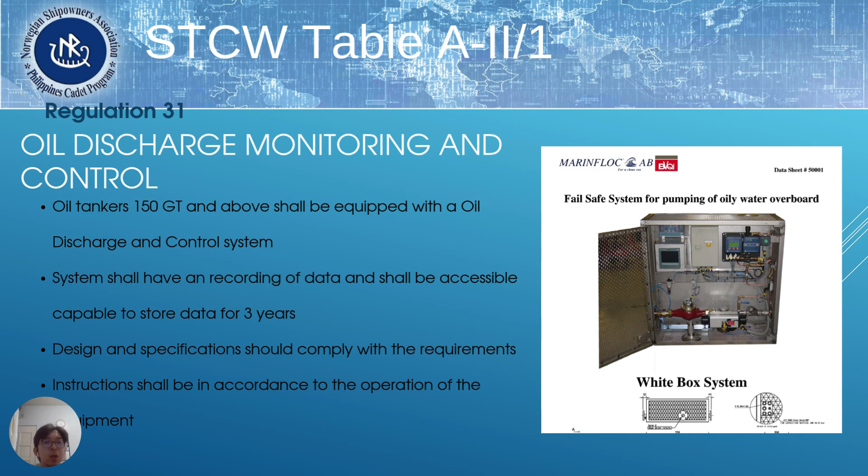Continuing our discussion, our next topic is crude oil washing, or COW. The COW is a machine used to clean the cargo hold. I'll show you a video of how it operates and how it works.

Let's first look at the different types of crude oil washing machine. There are two types: the single nozzle programmable and the non-programmable twin nozzle types.

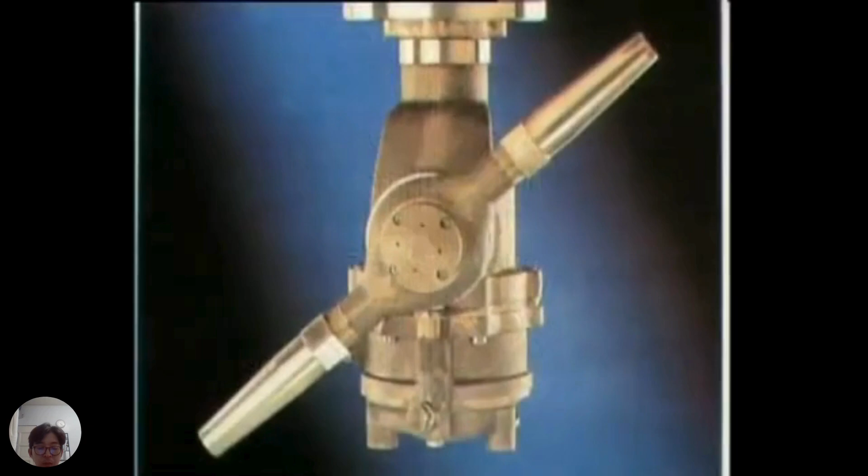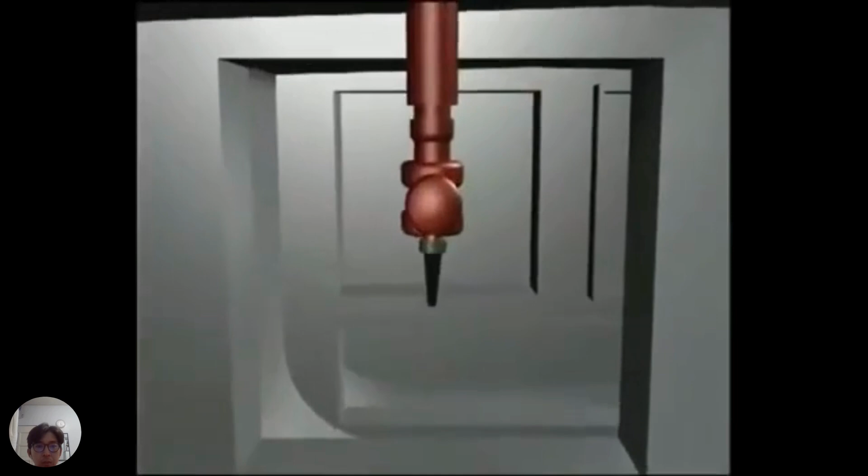Single nozzle programmable machines can be set to wash specific areas of the tank. To save time, the upper parts of the tank can be washed during the bulk discharge. A typical initial wash pattern might wash from 140 degrees to 30 degrees.

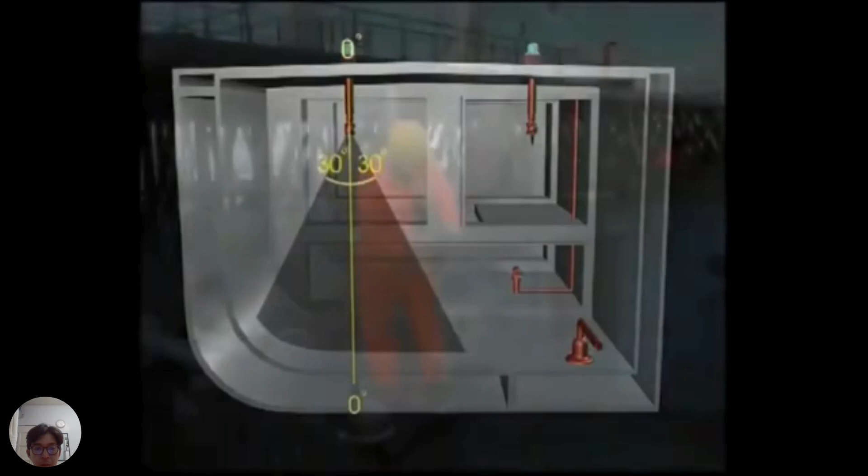As most residues are on the bottom, the wash might include two cycles: one washing from 60 degrees to 0, and one from 30 degrees to 0. After the first cycle, soundings should be made to determine the effectiveness of the COW, the residue present, and whether a second bottom wash is needed.

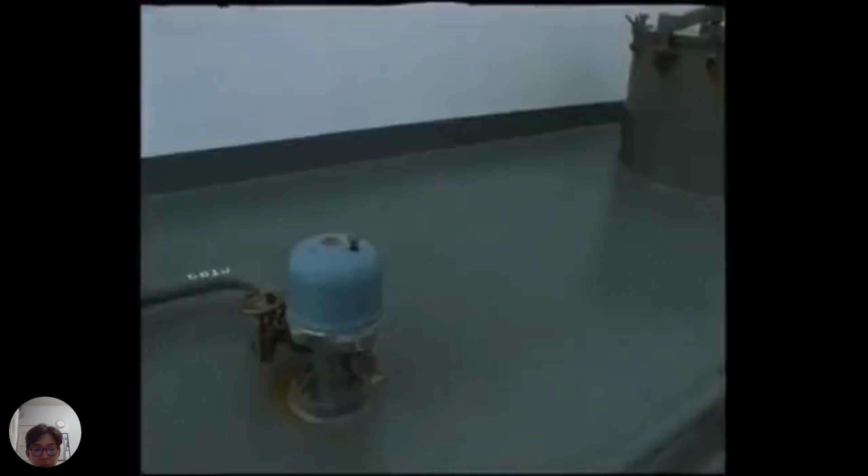With double-hulled ships, top washes may not be needed on every discharge. These programmable machines need to be programmed for every wash. Typically, they have a throughput of between 110 and 170 tons per hour.

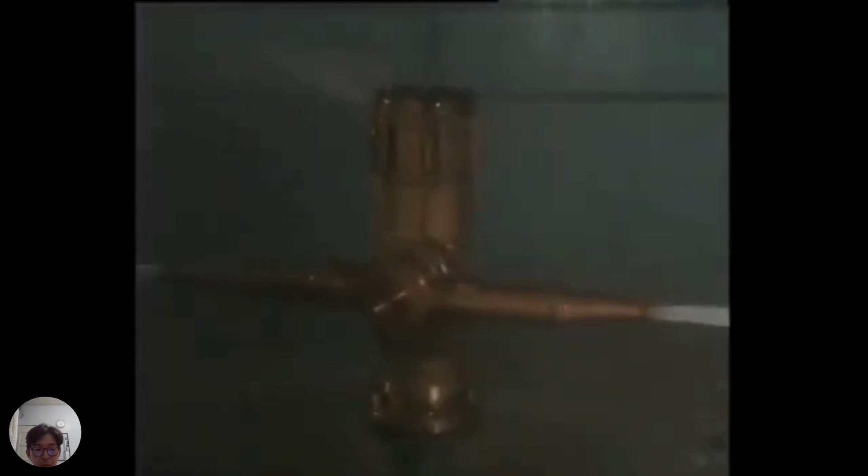The twin nozzle machines are not programmable. They always carry out a complete cycle in a specific time. The cycle time will depend on the correct line pressure.

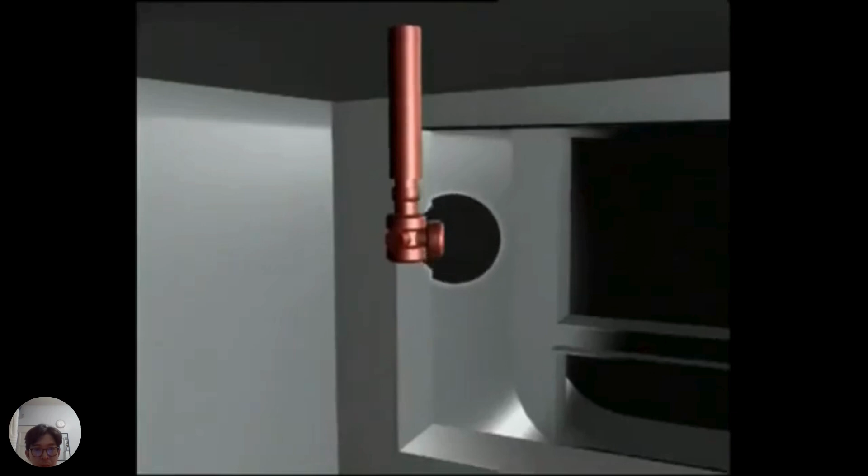During bottom washing, it is essential that there is no liquid buildup, as even 20 centimeters of oil will protect the residue from the jet action of the COW machines.

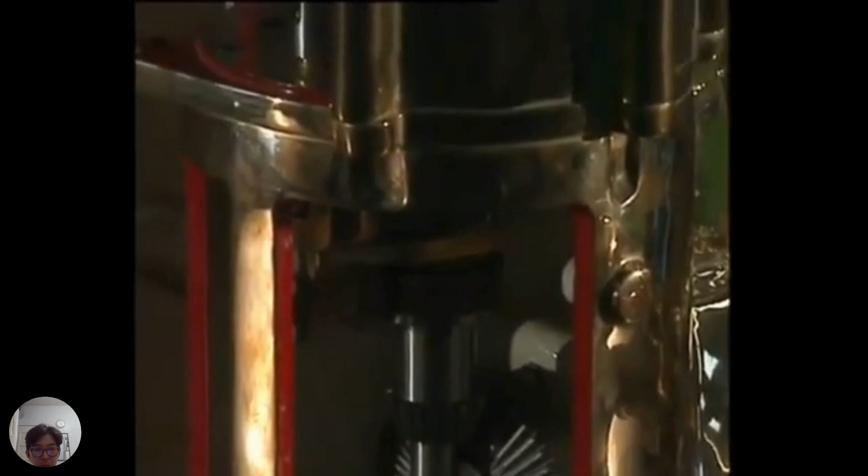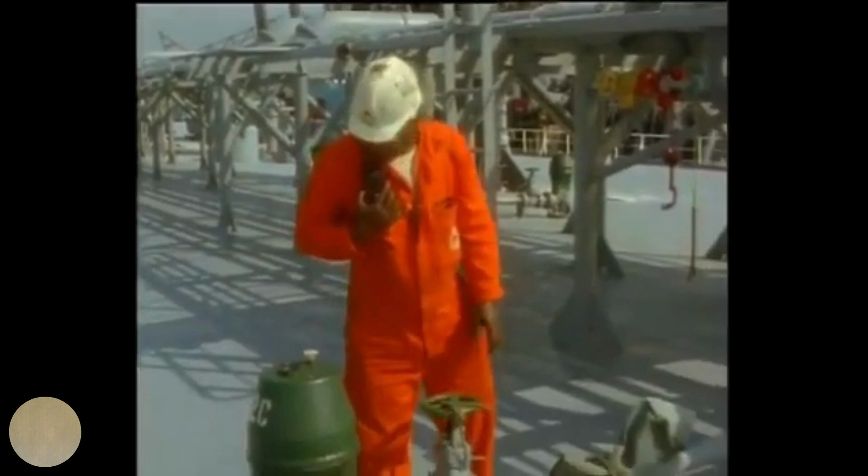Crude oil washing machines are driven by oil from the cargo pumps acting on an impeller. For the washing to be effective, the oil pressure must be correct. If it's not correct, the oil will not hit the sludge with the right amount of energy, and neither the jet length nor the cycle time will be up to specification. The result will be ineffective and prolonged washing. The penalties include increased discharge time and increased oil remaining on board.

The washing machines are fitted according to the individual tank's shadow diagram and the MARPOL requirements. The equipment is always tested before certification.

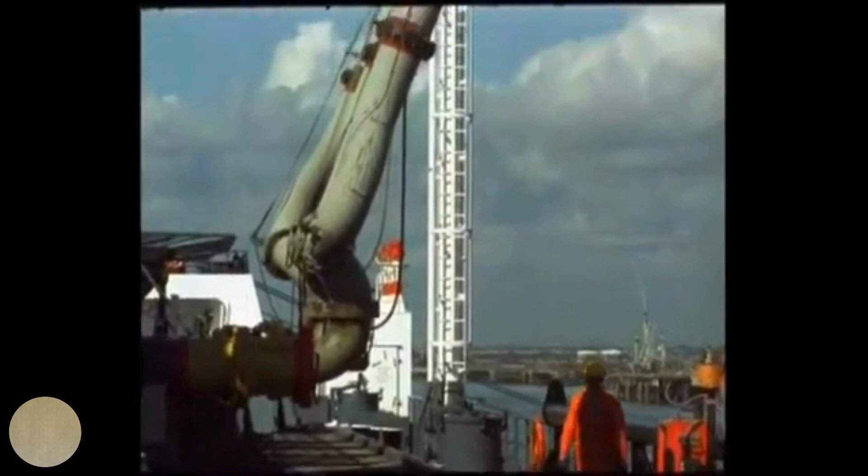Crude oil washing is all about getting as much oil ashore as possible. So about half the discharge time is spent bulk discharging the cargo, and about half crude oil washing and stripping.

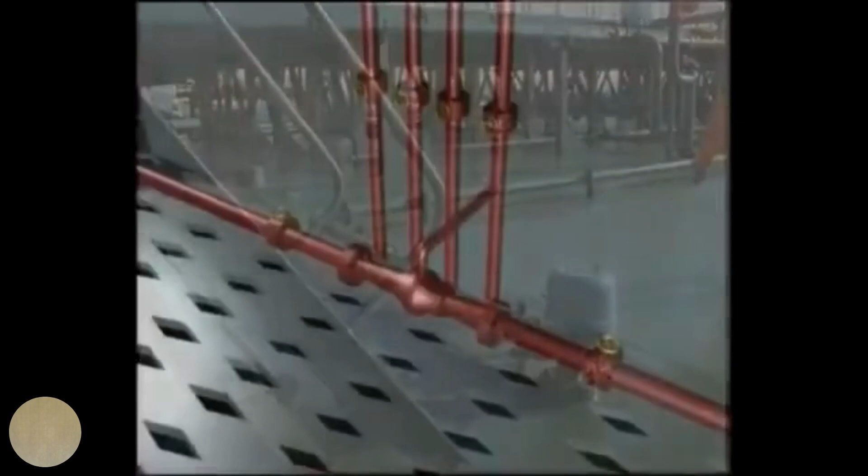Eductors are the preferred way of stripping. They have no moving parts but require a good supply of cargo at the correct pressure. Stripping pumps and vac strip systems are also commonly used. Check your manuals to see the equipment fitted to your ship.

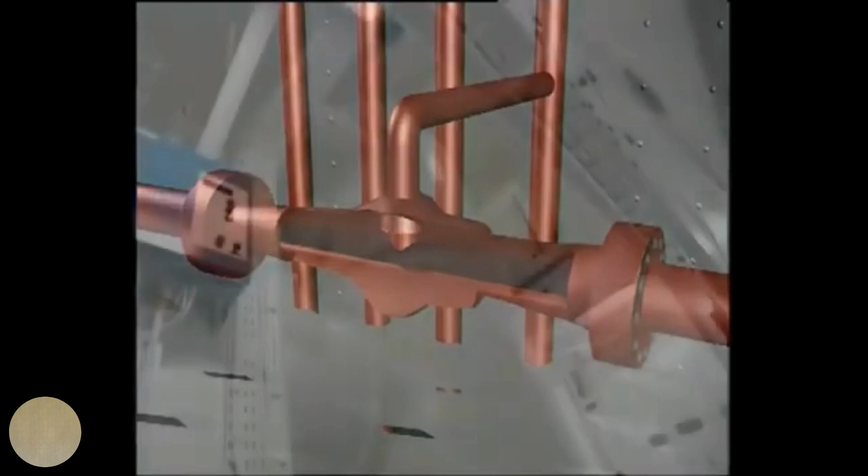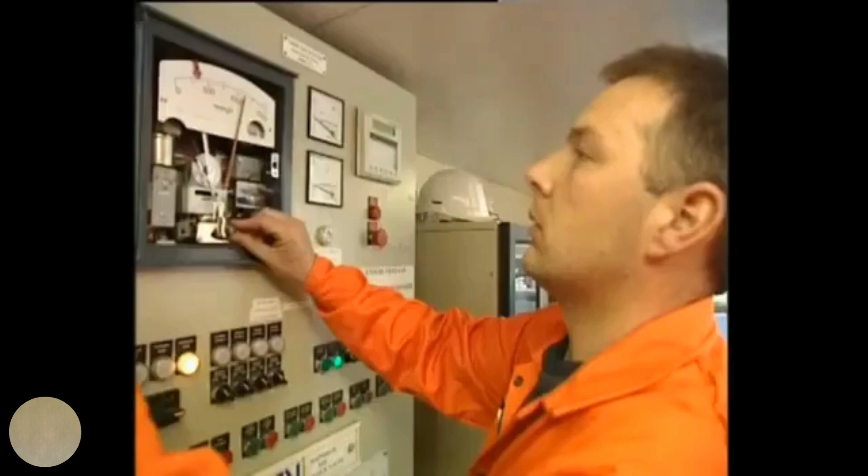Crude oil washing is only possible with inert tank atmospheres, so this makes the inert gas system another component of the COW system. The inert gas system is dealt with in a companion training package.

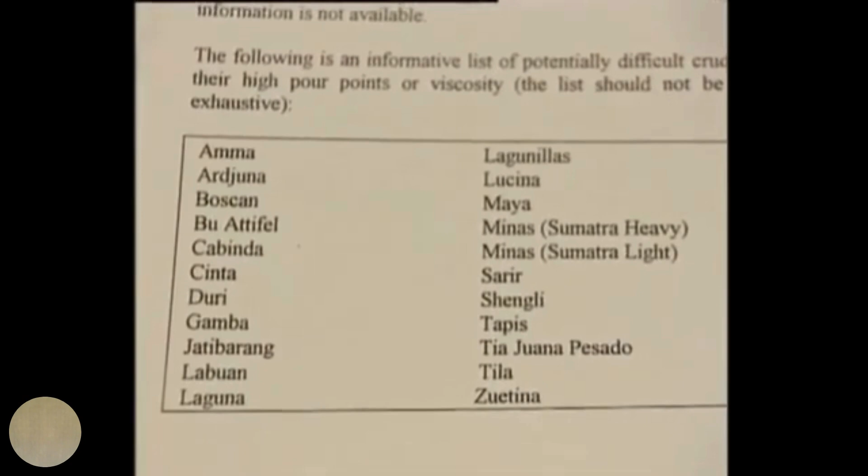The final component is the right crude oil. Some heavy crudes are designated unsuitable for COW by the IMO because they are very viscous. Check your ship's COW operations manual for details.

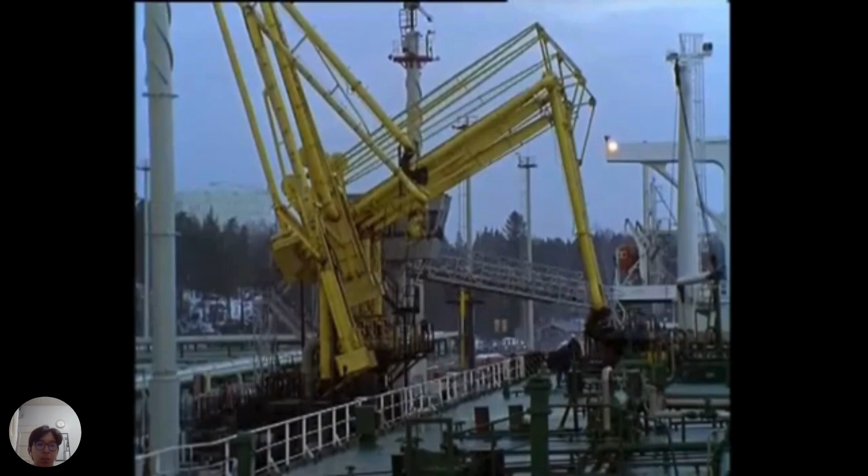Low temperatures can pose the risk of crude oil solidifying in the supply lines. It may need to be heated. The temperature of oil used for COW must be at least 10 degrees Celsius above its cloud point. Again, check your COW operations manual for more information.

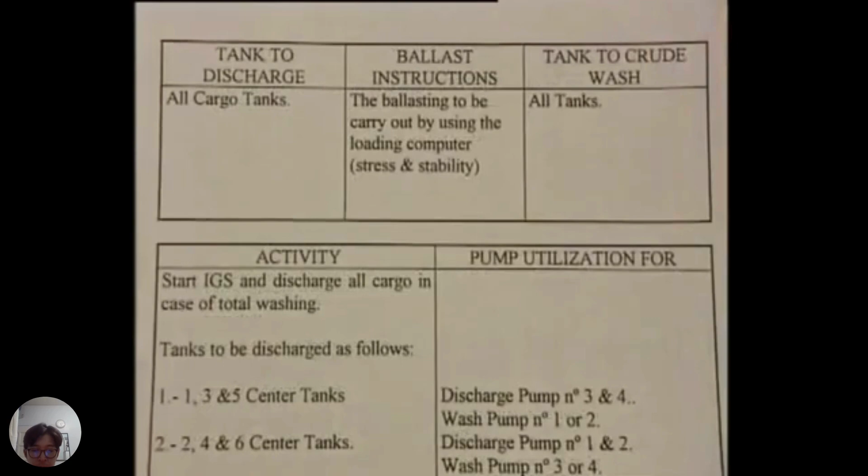This manual is a mandatory requirement for every tanker. It will contain the basis for the COW plan, itself the basis for the COW operation. The vessel requirements and charterer's instructions are also essential in planning crude oil washing.

I just received the voyage instructions here. You must always be certain that your COW plan meets your charter party obligations. Any doubts should be clarified between the master and the charterer before the planning of the discharge and crude oil washing. What I propose then is we do crude oil washing for MARPOL requirements, and additionally I would suggest we carry out a bottom wash for this grade to maximise outturn. I can't see there being any problems with that. I'll investigate with the agent just in case. Okay, then, I'll plan accordingly.

The washing plan is an integral part of the discharge plan. Calculation of stress, trim and draft is essential for every hour of the discharge. Careful thought is required, particularly if there is more than one crude on board or more than one discharge port. You must not just reuse old plans unless the discharging circumstances are identical.

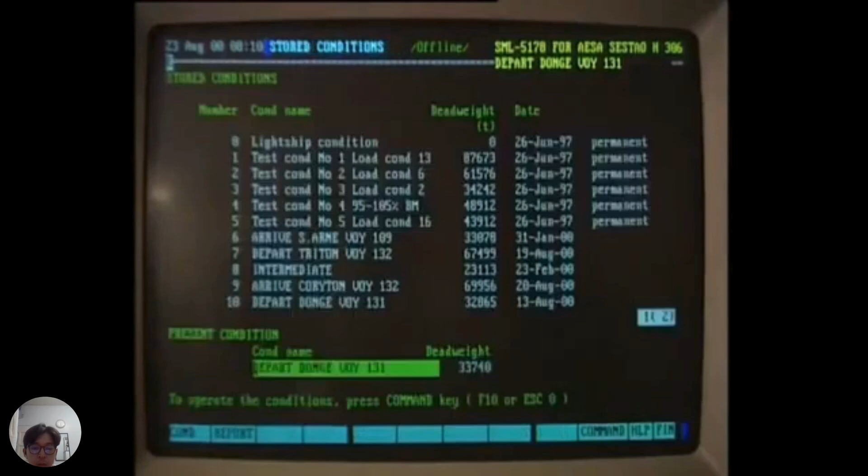Different crudes will contain different amounts of wax and sediment. The more wax, the more washing they will require. If a slop tank is being used as a reservoir for COW, it must be recharged from time to time to keep the crude oil fresh and not saturated with wax.

Overwashing using light crudes should be avoided, as it means loss of some of the higher fractions. Time will be a crucial factor. That's why it's essential to know the cycle times of the washing machines to allow sufficient time.

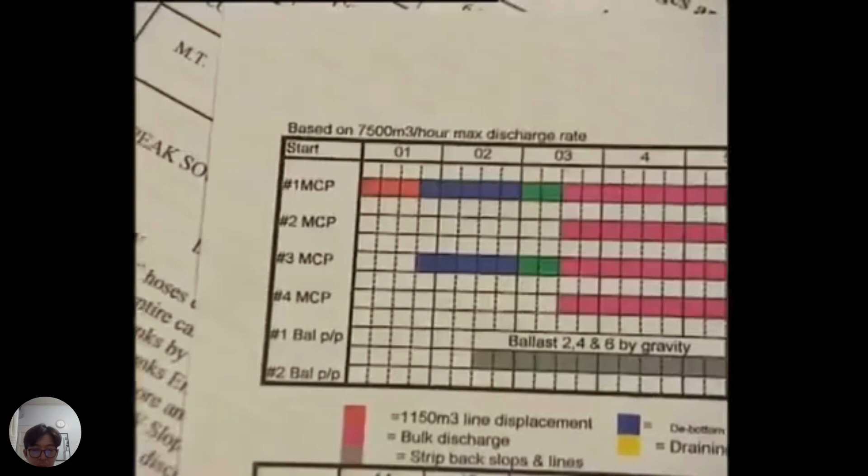Allowance must be made for cargo pump capacity for washing and final stripping. The trim will affect the crude oil washing. The International Safety Guide for Oil Tankers and Terminals recommends the use of a bar chart showing pump and cargo lines being used, including COW requirements. This will help ensure that the right equipment and cargo is available for washing.

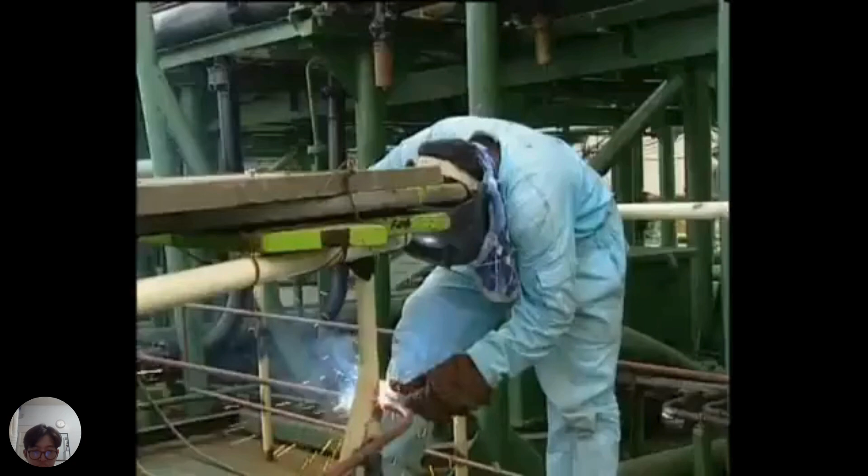The plan must always take into account that the ship will need to dry dock. Additional washing during the last few discharges before dry dock will reduce the residues down to the minimum and avoid delays and the high costs of manual desludging.

Once the master has approved the plan, the watch-keeping officers need to sign it. All officers involved in the discharge must have access to the plan. They should be encouraged to ask questions to ensure that they understand what needs to be done and when.

And it's a full bottom wash on all tanks. We're doing that to maximise the outturn with this particular grade as it's slightly heavier than usual. Any other questions at all? No, that's it, that's fine.

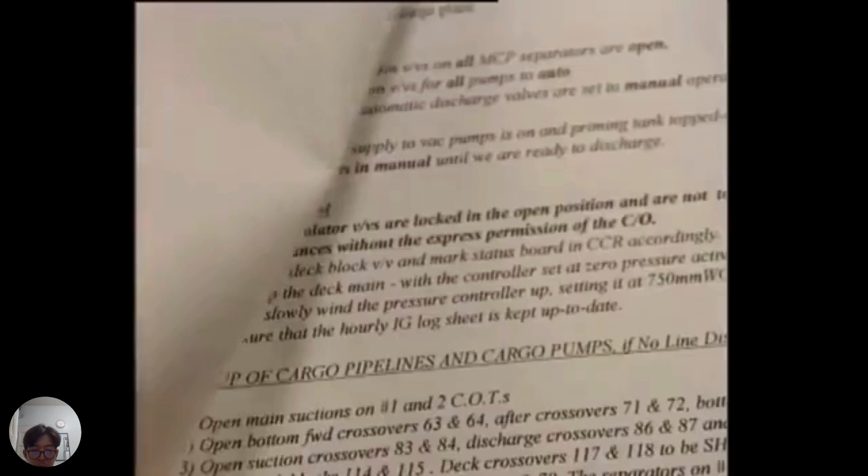The plan is the basis for the COW operation. The terminal staff will need to approve it. Surveyors and inspectors may need to examine it.

The COW operation begins on the day before berthing. Your manuals will have a full COW checklist that you must keep to.

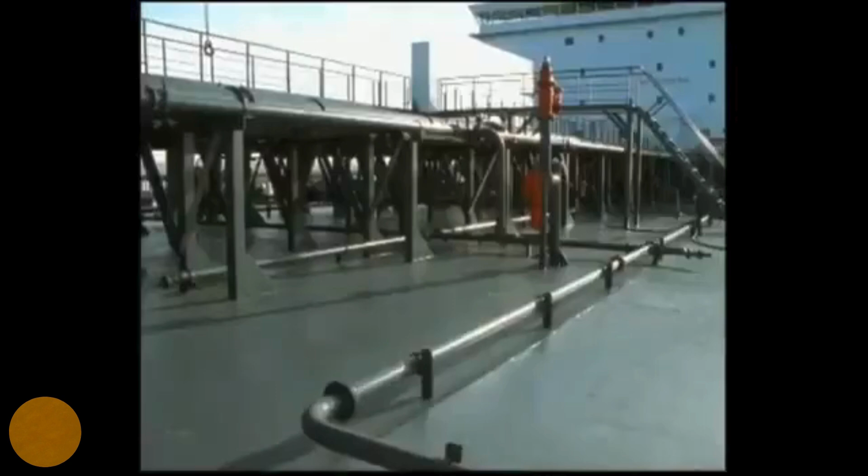Hello Jack, that's us just about to start the cargo pump to test the COW line. The COW lines must be pressure tested to normal working pressure. This can be done by recirculating cargo, but the pressure needs to be increased slowly to reduce the risk of hydraulic shock at the end of the lines.

Hello Jack, pump's running, just going to start increasing. We've got about 4 bar on the COW line now. Okay, there's no signs of any leak so far. Okay, just gradually bring the pump up now.

There must be a thorough inspection for leakage, and any leaks must be repaired. A record must be kept of the tests.

Okay Jack, that's us up to the 10 bar now. Can you just have a good look round please? Yeah, there doesn't seem to be any signs of any leaks out on deck. Okay, copy that. All pressure gauges must be checked.

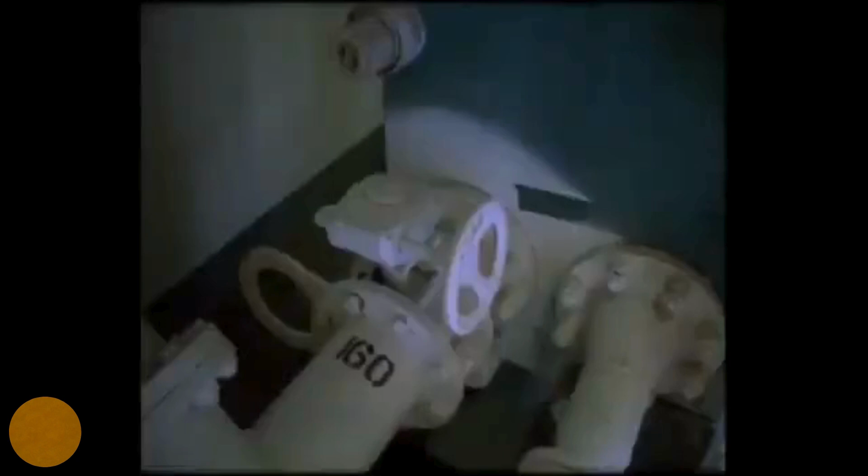This will include the gauges on the top discharge line, the manifold, and the main tank washing line. The washing lines must be isolated from the heating arrangements, and any hydrant valves on the washing line must be blanked. The stripping arrangements need to be checked.

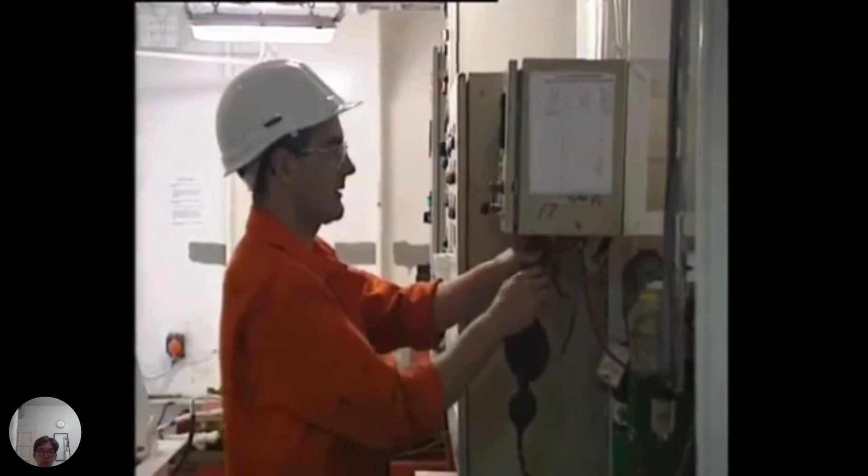Last but not least, the inert gas system should be checked and prepared as specified in the ship's IG manuals. Okay Jack, thanks very much. All these tests and checks need to be recorded in the log for presentation to the terminal staff.

Once alongside, the COW plan and the discharge plan must be scrutinized and approved by the terminal staff. The time must be taken by both sides to ensure that everyone is certain that everything is in order.

In addition to these plans, there are many issues that need to be agreed with shore staff. These will include details of terminal regulation, details of communication between the ship and the terminal, and emergency shutdown procedures.

The pump's now settled at 1200 revs there, Gary. If you want to come up while we do the line displacement. Once discharge begins, the COW plan becomes active.

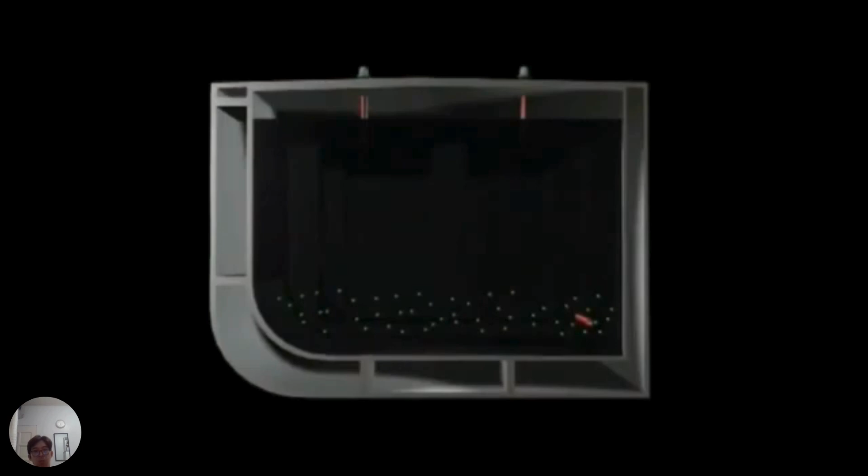To reduce the risk of electrostatic discharge inside the tanks during COW, any tank that is being used as a source for washing oil must be partially discharged by at least 1 metre. This ensures that any water that has settled out will not be used for COW.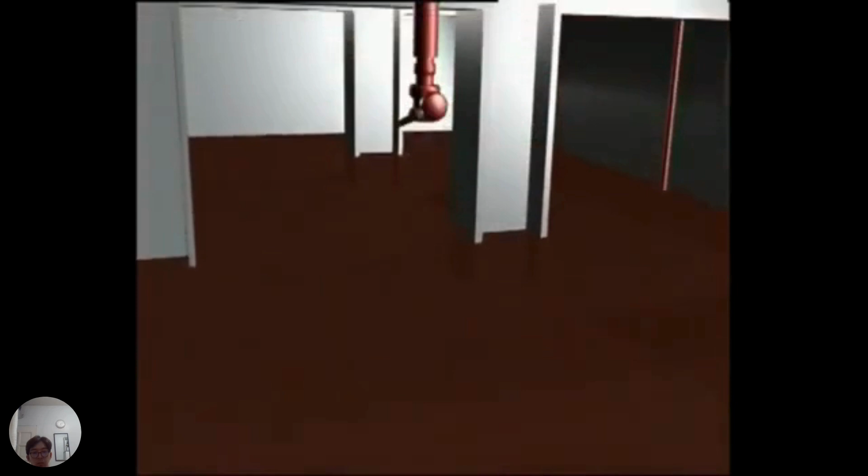If the slop tank is being used as a reservoir, it must be completely emptied and refilled. Care must be taken not to overpressurize or overfill the slop tank during backfilling.

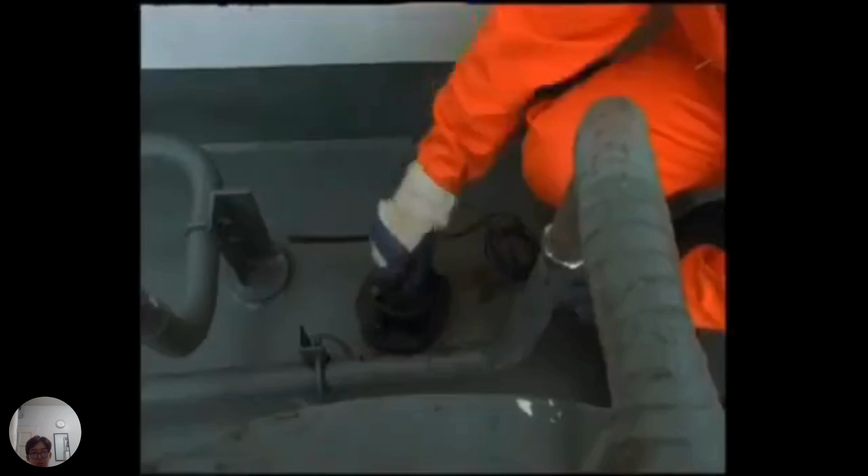Before washing starts in any tank, the oxygen content of the tank atmosphere must be checked to be certain that it's below the specified maximum. This means checking at several levels in the tank.

Hello Phil, can you stand by on the COW machines and the slop tank please? We're going to start cowing in a moment.

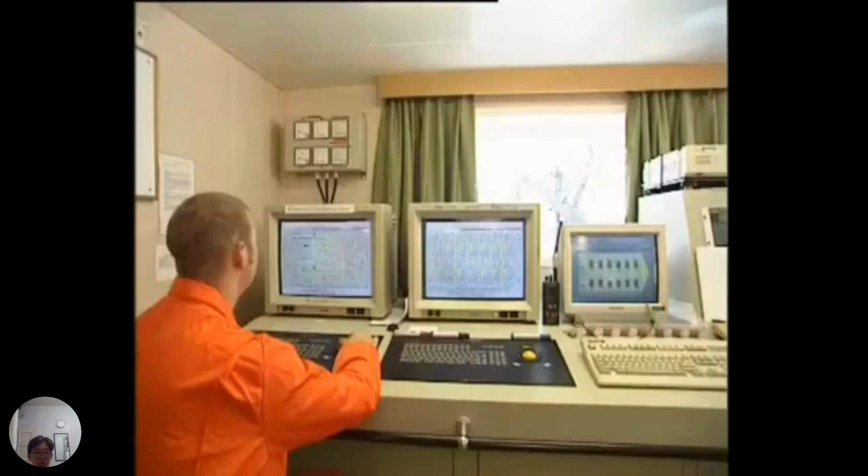Once discharge is underway, and once the tank to be used as a reservoir for the COW has been filled with dry oil, then at the appropriate time set out in the plan, the washing operation is started.

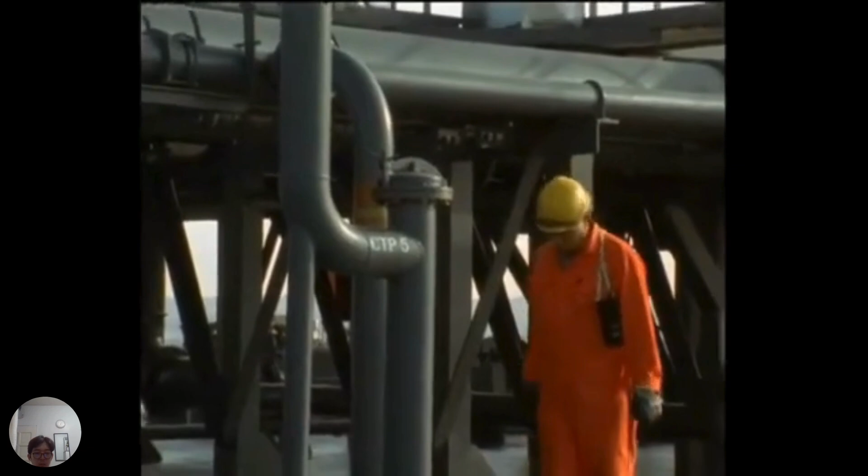Immediately, all the lines must be checked again for leaks by a crew member. While crude oil washing is underway, there should be at least one responsible person on the deck at all times, supervising and monitoring the procedure.

Regular inspections must be made, including checking that machines are fully operational and that the cycle times are correct. Check that the machines are washing in the right tanks.

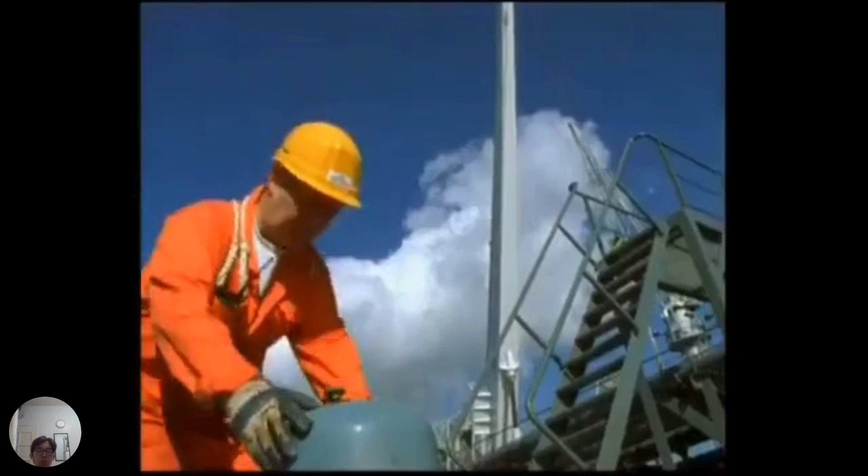Always take the time to check on each machine. You can tell a lot by listening to them. You should be able to hear the jet moving across the tank bulkhead.

Always keep an eye on the COW line pressure. Correct pressure is the key to effective washing.

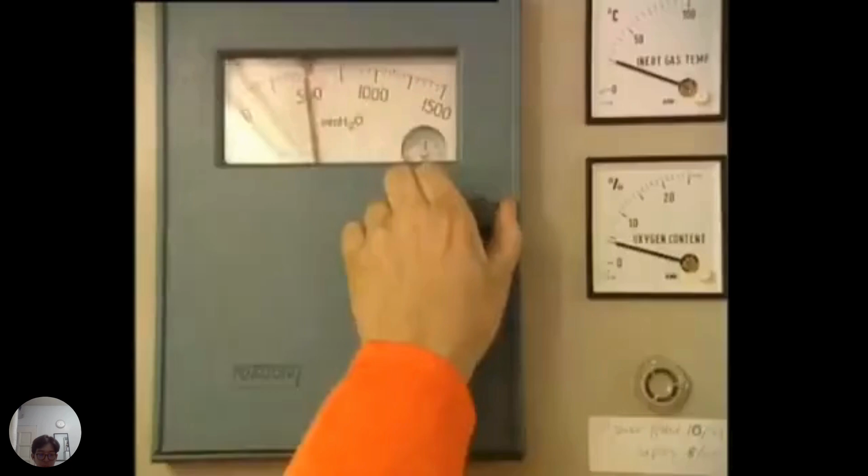Pressure in the tanks is important too. Make sure that vapor pressure does not build up during washing. This can lead to unplanned venting to atmosphere, which may be illegal in the terminal. Hot sunny days can have the same effect.

The plan must be kept to at all times. If things start to go wrong, the chief officer must be notified immediately. Better to call him sooner rather than later if you are in any doubt.

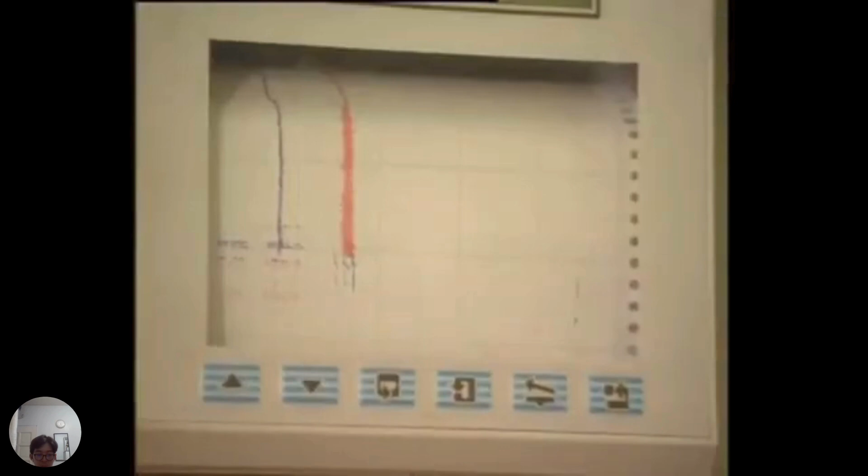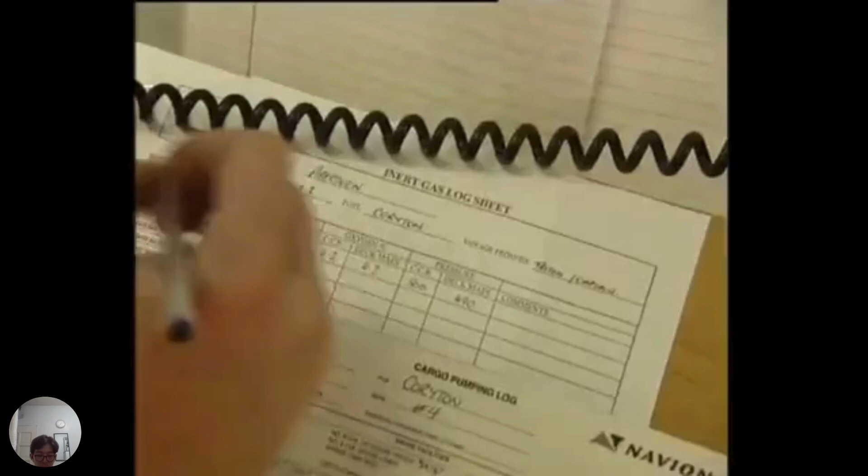Always check that the inert gas system is operating correctly, with an oxygen content below 5% or below 8% for older ships, and enough pressure to maintain an excess pressure of 100 millimeters water gauge in the tanks. If the oxygen level increases, the discharge may have to be stopped, and with that, the COW.

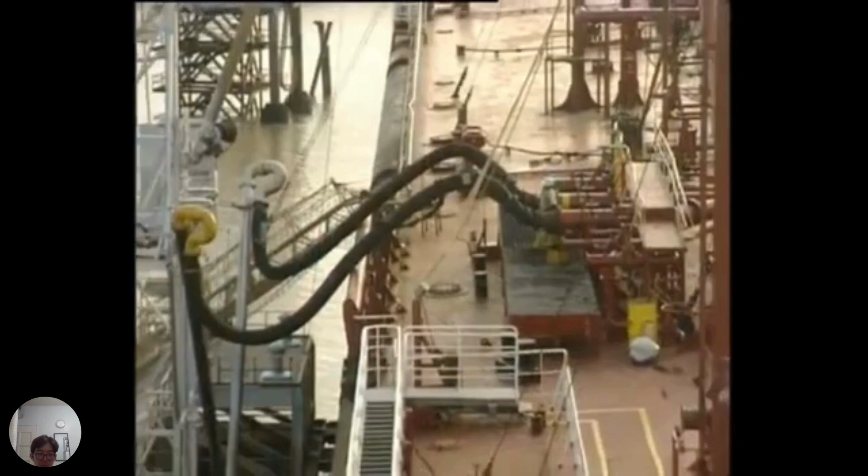If ballasting is being carried out in a non-segregated ballast tank ship at the same time as cargo discharge and cow, then there must be strict supervision. This is because of the increased risk of over or under pressurization and the risk of cross-contamination between cargo and ballast lines.

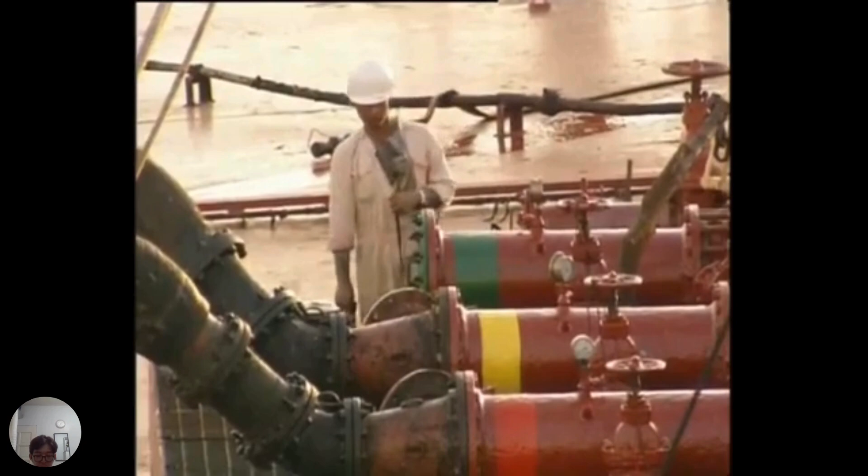The most important part of the crude oil washing program is the bottom washing. The trim becomes of vital importance for the final stages of bottom washing.

Hello Dave, that's the branch on 5 shut. The machine should be stopped now. You can dip the tank please.

The bottom wash is monitored using a dipping rod or by remote gauging. The dipping rod must be used at the aft end of the tank. It's important to avoid excessive build-up on the bottom, as this will reduce the efficiency of the washing process.

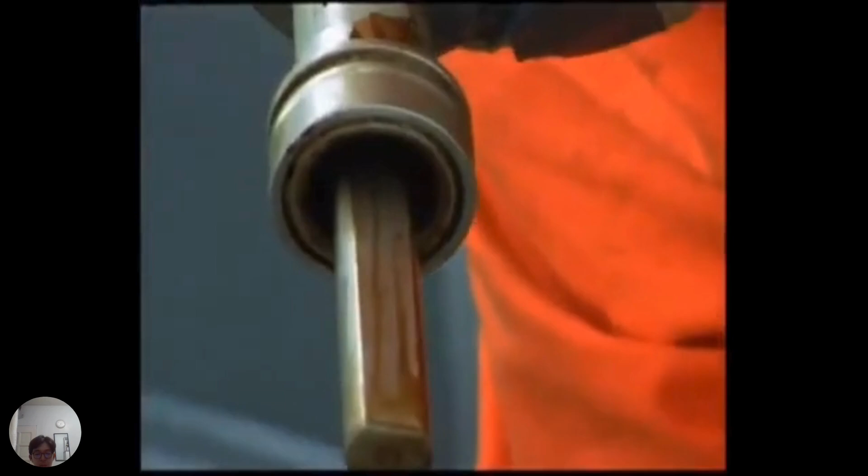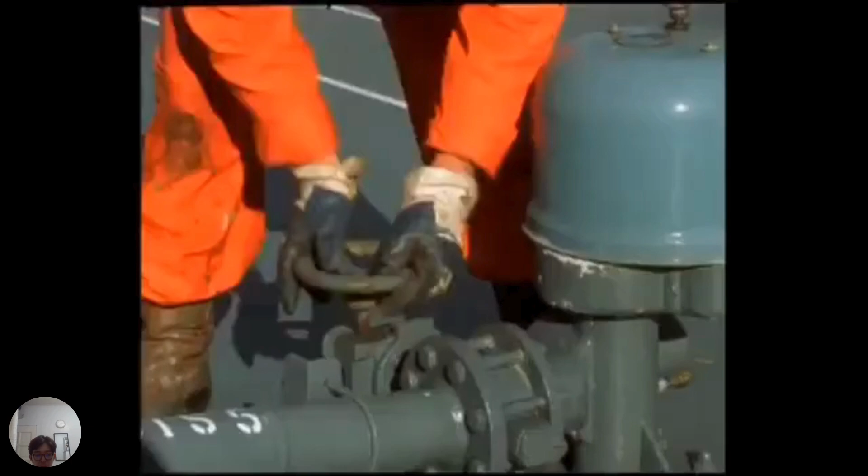When washing has stopped, the valve to each washing machine must be closed. That's the crude oil washing complete. If you can slow the pump down to 12.

Once the cargo operation is complete, all main lines and stripping lines, pumps and cow lines must be drained as quickly as possible. This is very important if the crude oil has been heated.

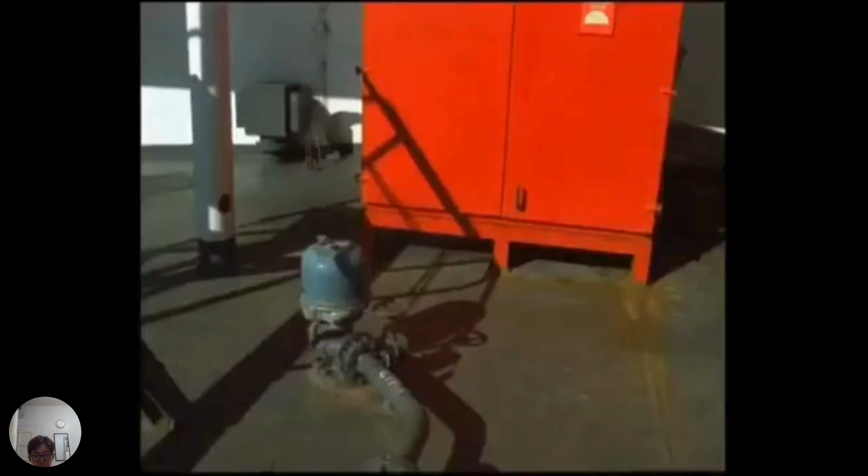Hello Deck, that's the crude oil washing complete. We've shut the branch into the cow system. If you can go and open the machine forward in one port and aft in the slop tanks please to drain the system down. To speed this up, open one forward washing machine and one machine in the slop tank,

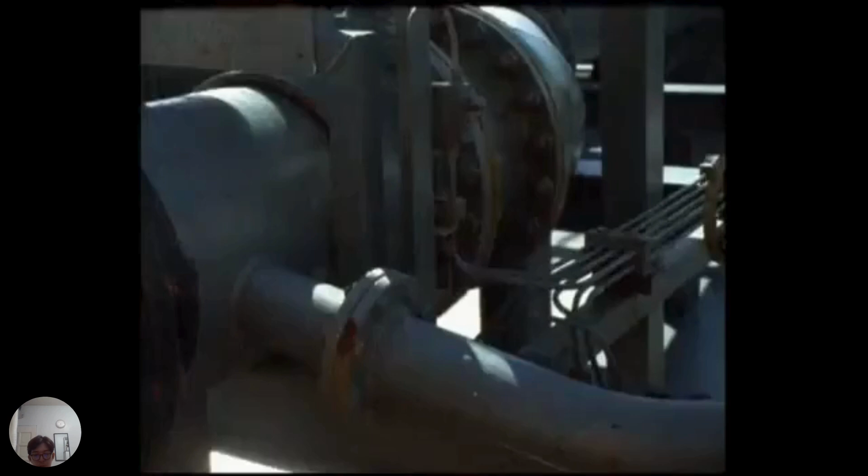so that all the cargo in the cow line drains into the slop tank. Final tank and line draining is done with a stripping pump connected to the shore, using a small line called the MARPOL line.

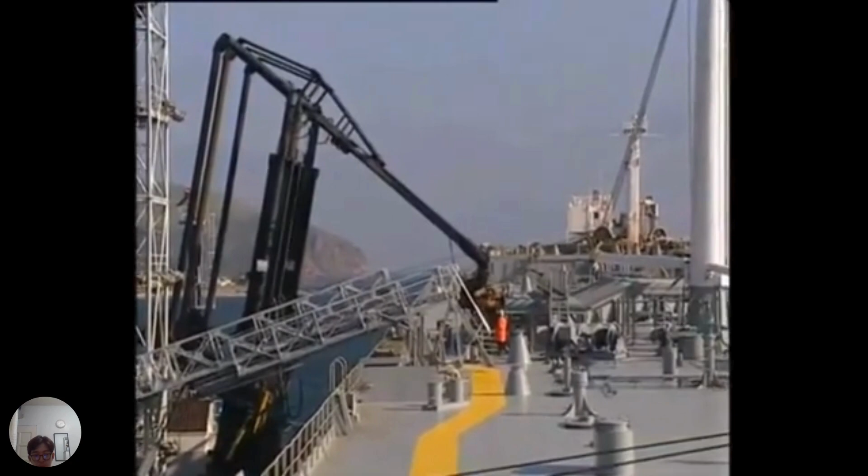Crude oil washing is an important part of crude oil discharge. Effective crude oil washing increases cargo outturns, reduces the amount of sludge buildup, and reduces the risk of pollution.

Effective maintenance of the washing machines is important. COW machines are not fit and forget. Make sure you maintain them according to the manufacturer's standards.

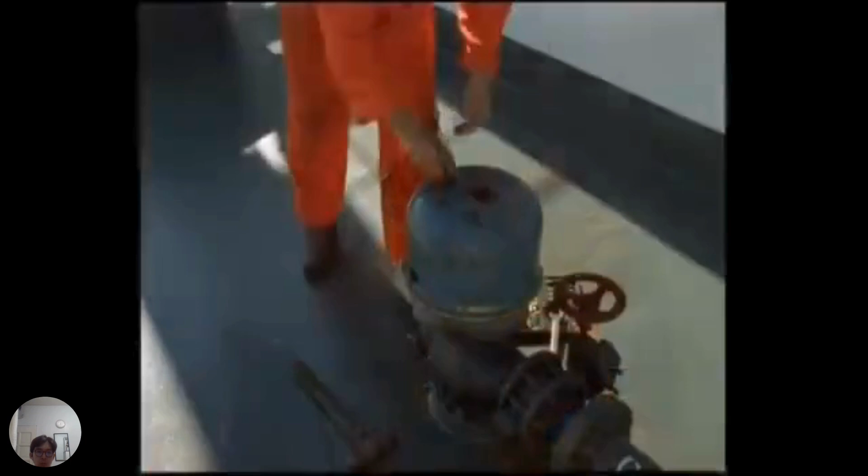Eductors need attention too. Check the time taken to strip a set quantity of liquid from a cargo tank. Loss in performance usually means that the eductor nozzle is worn and must be replaced.

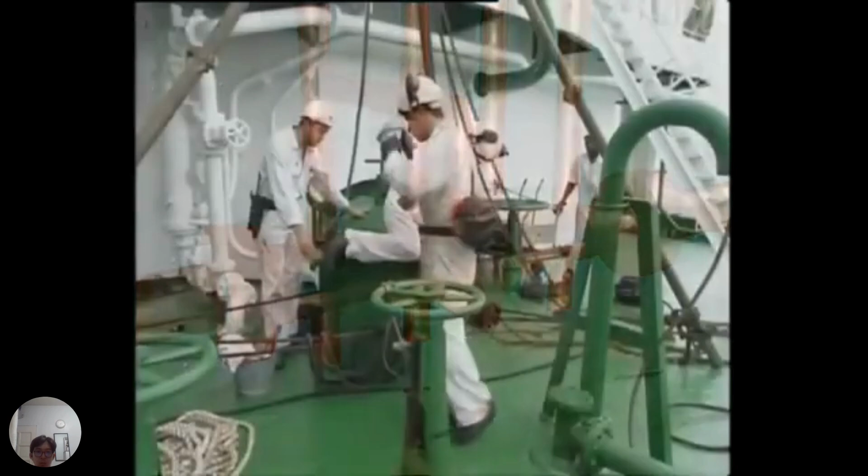Most of all, regular inspection of the tanks will tell you how well the COW machines are operating. Any build-up of residue should be noted and investigated.

Keep to the procedures described in your ship's manual. Always make sure that the plan fulfills charter party requirements and that this is recorded in the log.

For further information, refer to the crude oil washing requirements in order to ensure that the COW is effectively protecting the marine environment against pollution. The design, operation, and control of COW systems are required to the IMO specification.

IMO stands for International Maritime Organization, and only crude oil tankers in which the COW system and operation are surveyed and found to be in accordance with the specification will be issued the IOPP certificate, which stands for International Oil Pollution Prevention.

So again, the COW system is only available for tanker vessels which are crude oil tankers.

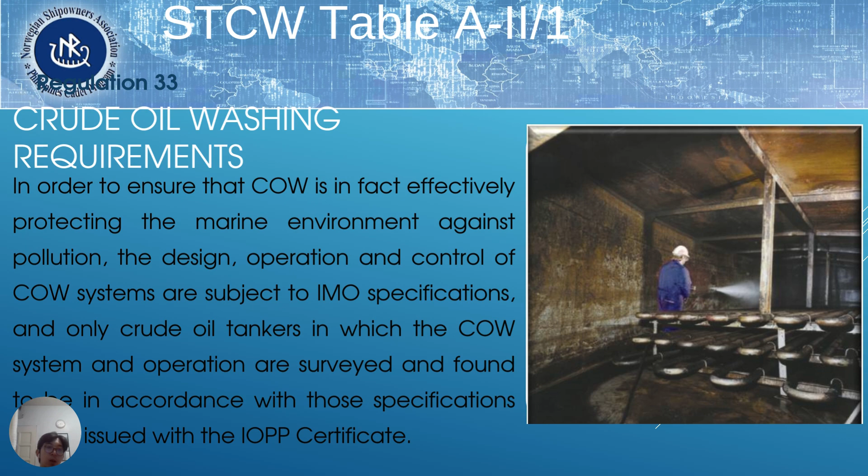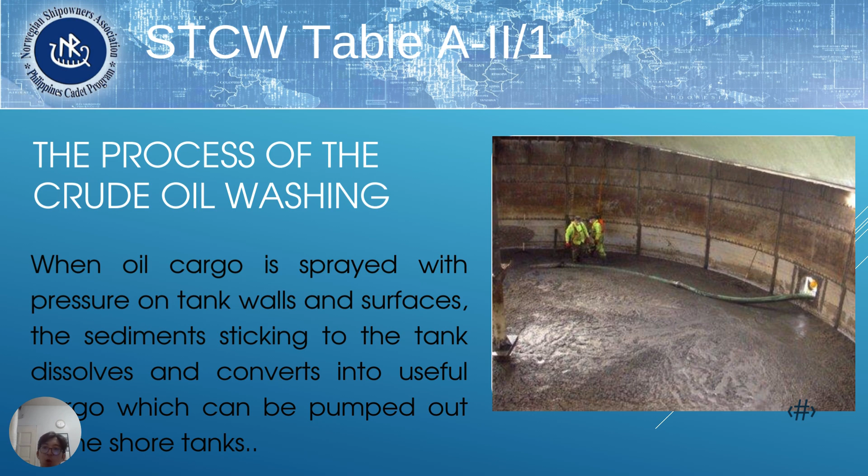The process of crude oil washing virtually eliminates the requirement of slop tanks on ships, and almost all cargo can be transferred to shore.

So what is the advantage of COW? First, reduction of pollution, potential increase in cargo outturn, less dead freight, reducing the residue left behind.

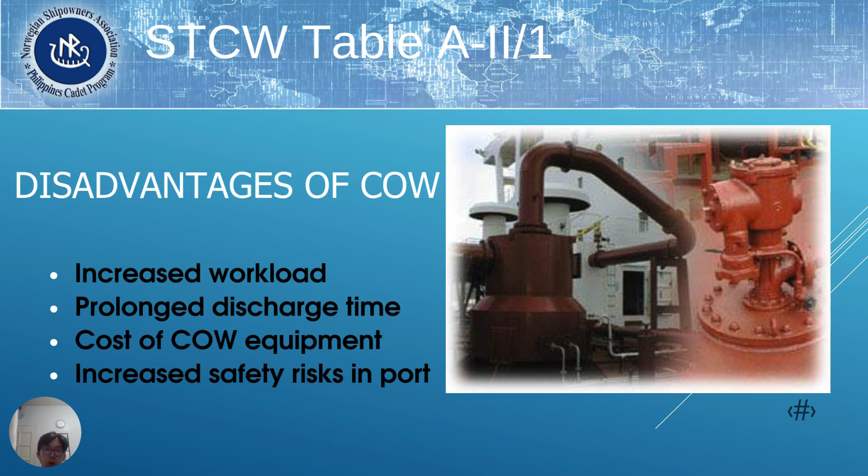What is the criteria for discharging? Before any pre-wash or discharge procedure is carried out in accordance with the regulation, the relevant tank should be emptied to the maximum extent in accordance with the procedure.

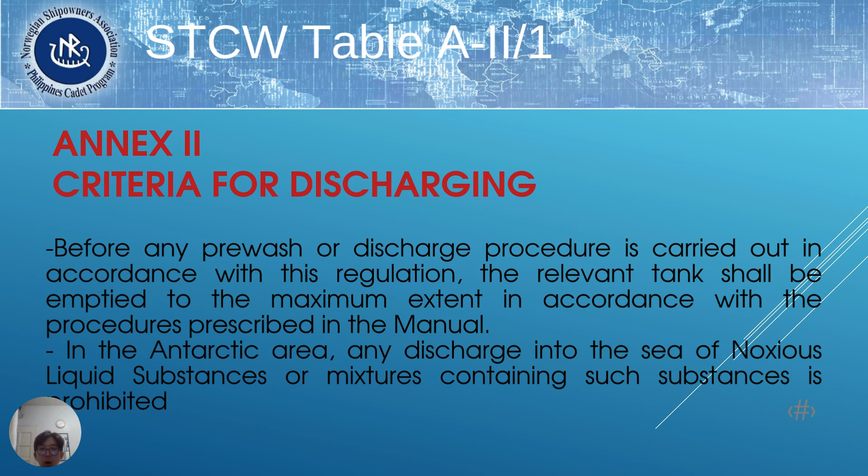When discharging, we also have the documentation. For documents relating to the carriage of harmful substances by sea, the correct technical name of each such substance shall be used, and the substance further identified by the addition of the words marine pollutant.

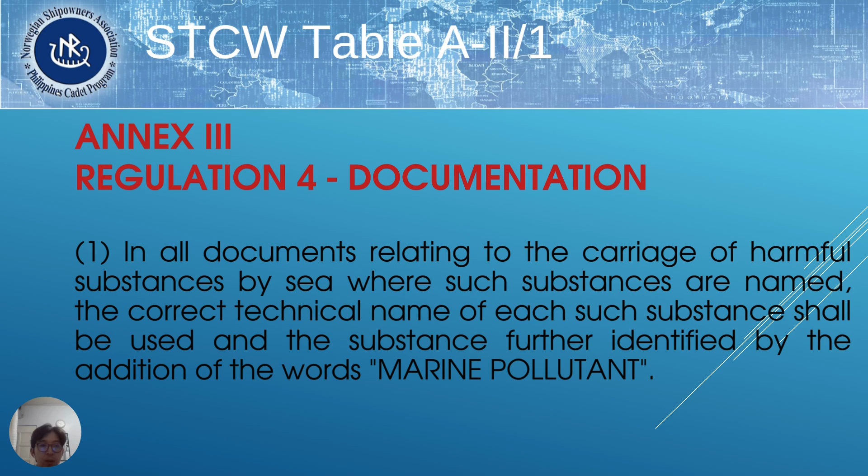Also under the regulation for documentation, it must be packaged, marked, labeled, and placarded as appropriate, and in proper condition for carriage to minimize the hazard to the marine environment.

As we have discussed last week about the classes of the IMDG code.

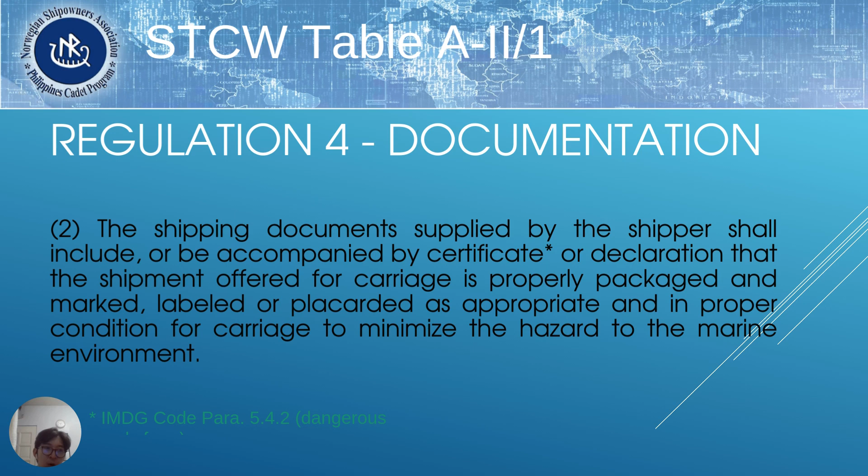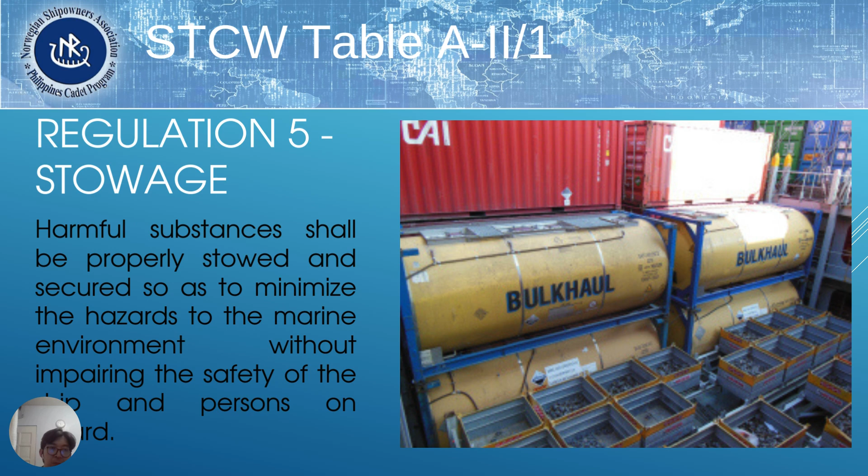For stowage, harmful substances shall be properly stowed, secured, and arranged to minimize the hazard for the marine environment without impairing the safety of the ship and the persons on board, which is the crew.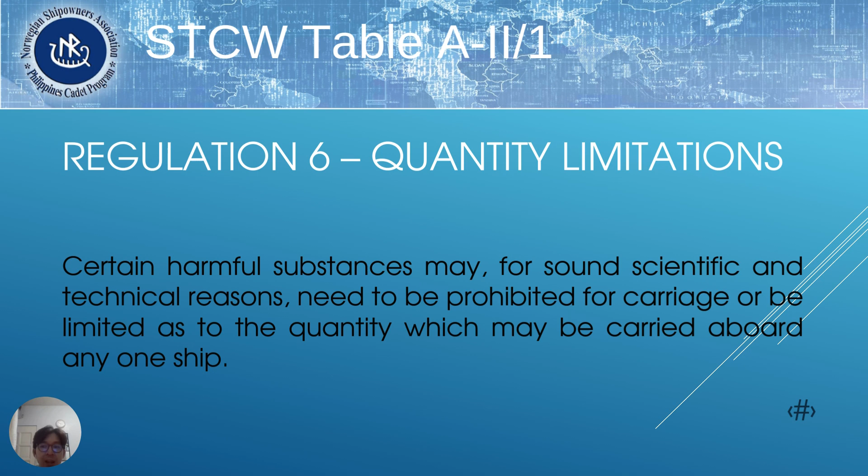Where there are clear grounds for believing that the master or the crew are not familiar with the essential shipboard procedures relating to the prevention of pollution by harmful substances, the party shall take steps to ensure that the ship shall not sail until the situation has been brought into order.

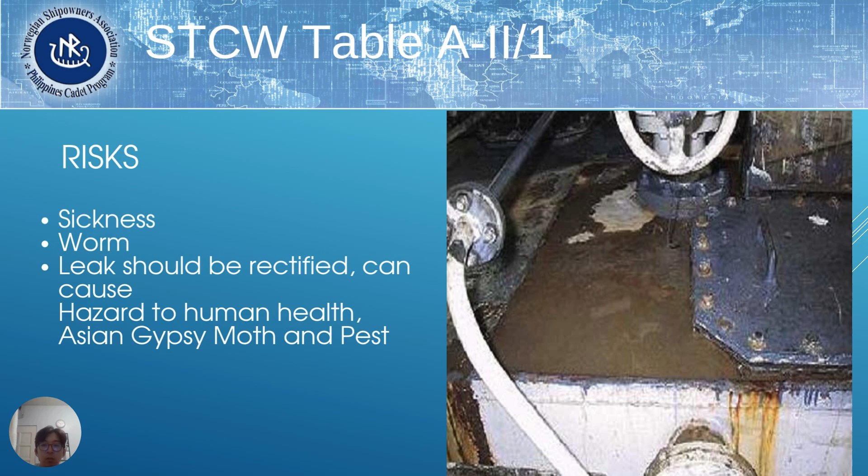Equipment requirements: discharge pipeline fitted, standard discharge, approved sewage treatment, comminuted disinfection system, and temporary means of storage and holding tank.

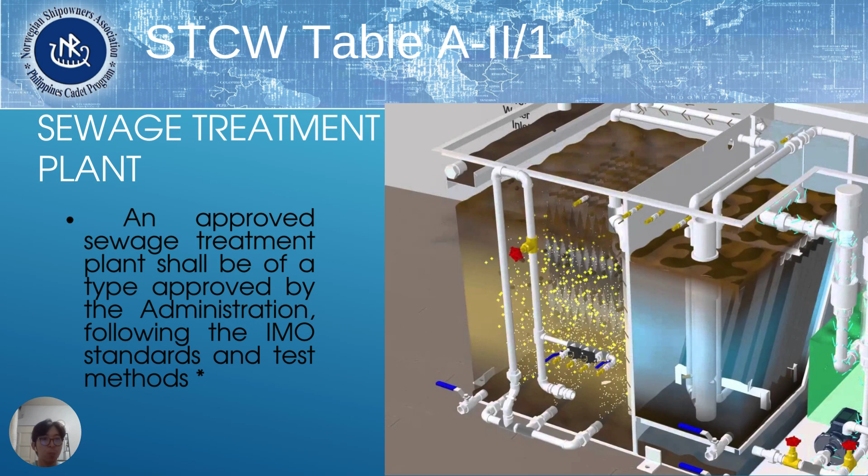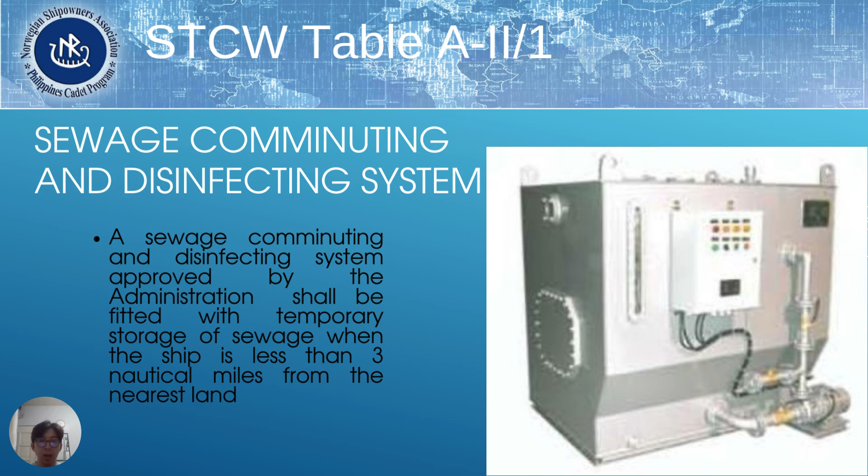So we have the sewage comminuting and disinfecting system. It is grinded there so that what comes out through the overboard is smaller, and it is also treated to remove bacteria and for the safety of marine life.

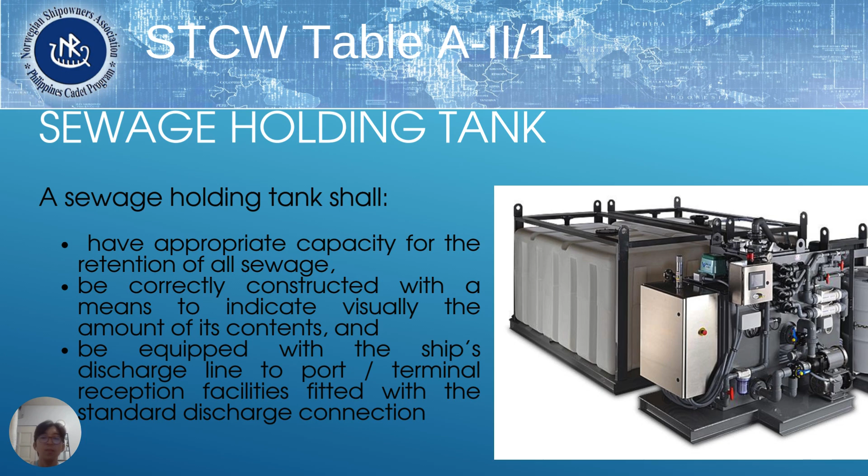Sewage treatment plant should be approved in accordance with MARPOL or the IMO resolution under December 1976 standards. It was adopted during October 2006 and applicable for equipment installed after January 2010.

We must take note that different administrations have different quantities of sewage and gray water effluent. The capacity depends on the flushing system, the number of people on board, ship's type, and trading pattern.

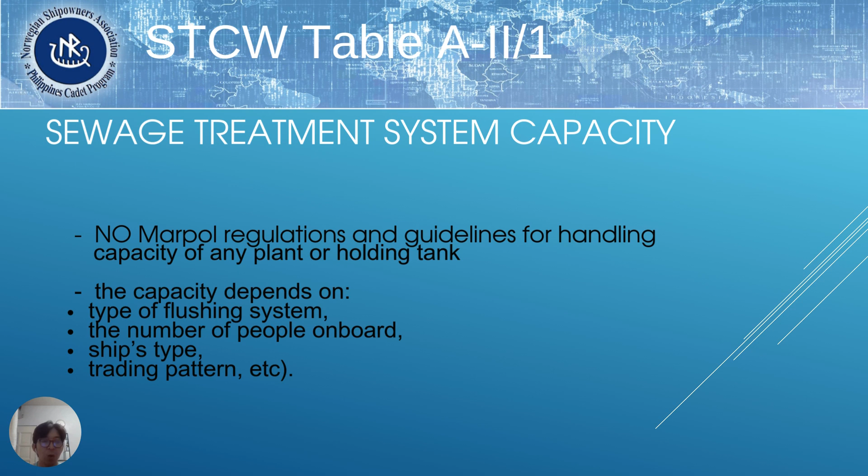Protection measures required by Annex 5. The main objective of these guidelines is to assist the government in developing and enforcing domestic laws implemented under Annex 5, and to assist vessel operators in complying with Annex 5 and domestic laws.

It also assists the terminal operator in assessing the need for providing adequate reception facilities for garbage generated on different types of ships.